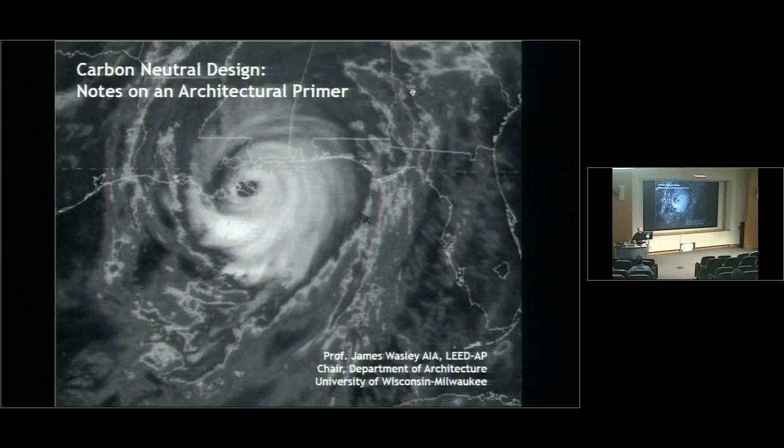So I'm going to be talking about carbon neutral design, and I'm just curious, what are people's interests, background, skills? Engineering, architecture, other fields? Architecture. Good. Engineering. Good. Anything else? Policy. Well, I'm going to talk about, it's a bit of a postmortem, and it's a bit of a kludged together lecture, 2 different projects that have been mining the same general vein.

The Carbon Neutral Design Project, which is what I was invited here to talk about, really didn't quite die. It went into a deep stasis when the economy fell apart. It was funded by the AIA, and everybody we were working with at the AIA was no longer working at the AIA. So I'm going to talk about a project that hasn't really realized its potentials. It had very ambitious complicated goals, and it had very ambitious, simple goals. And what I want to try to do today is talk, at least in an introductory way, that's why I called it a primer, on some of the simple ways of thinking about carbon neutrality.

Because if you're all engineers, my message to you is that if you're going to be working with architects, you need to communicate to them that it's their job to reduce the loads of these buildings down to the point where you can engineer them to carbon neutrality, because it is a design problem. It's not fundamentally an engineering problem. Sorry to tell you that, but I think this knowledge should empower you.

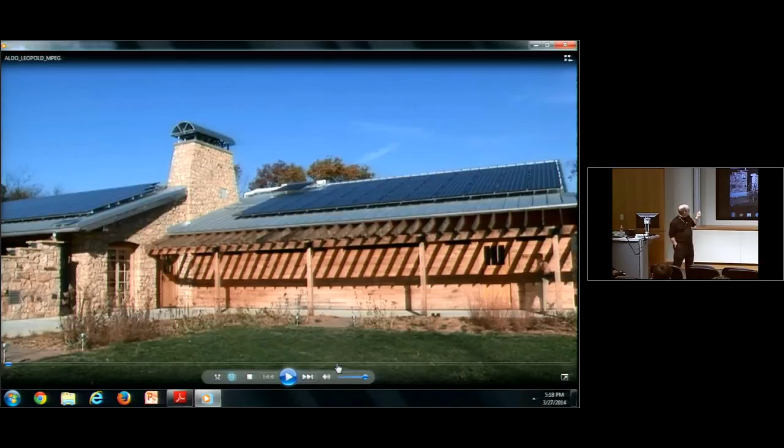I want to show a short video. This is going to set the stage a bit. It's a little bit of a diversion, but it does talk about the building that was at the heart of the Carbon Neutral Project. This is the Aldo Leopold Legacy Center. How many people have heard of Aldo Leopold? Only 2 of you. So Aldo Leopold was a great naturalist, really. In some versions of events, the father of American environmentalism.

He taught at Madison. This building is built outside of Madison on a farm that he reclaimed. It was a Dust Bowl property in the Sand Counties of Wisconsin. So it's a book called A Sand County Almanac. And if you haven't heard of that, it's a great piece of American literature on environmental thinking. So this building is built to honor his legacy. And I just want to play you this brief video that was thrown together to try to explain some of the ideas of the Carbon Neutral Project. And the sound should come up here in a minute.

Part of the limitation that architects have is their fee only goes as far as the completion of the building construction. So they have no way of learning, getting much feedback at all from how a building operates. It's just the economic structure of what we have to deal with.

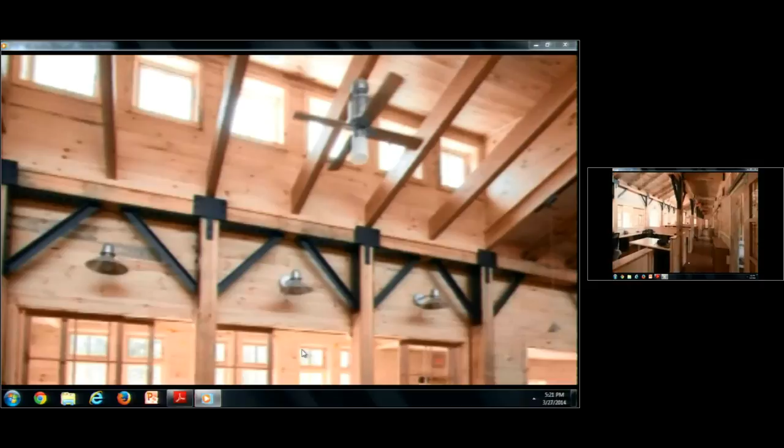The case study, and especially the work of Mike Utzinger, and the ability of the university to research how a building operates is utterly valuable to us as a student. So the case study is a direct feedback loop to the next building that we design.

The Aldo Leopold Foundation had a client who requested that the design team design a carbon neutral building, and we had to define what that was. And the process that we did in doing that was we said that the building had to be net zero. That is, the energy that we generate from the sun over the year for the building had to at least equal the energy that would come in from the grid. That is, what we produced had to equal the entire building's energy demand.

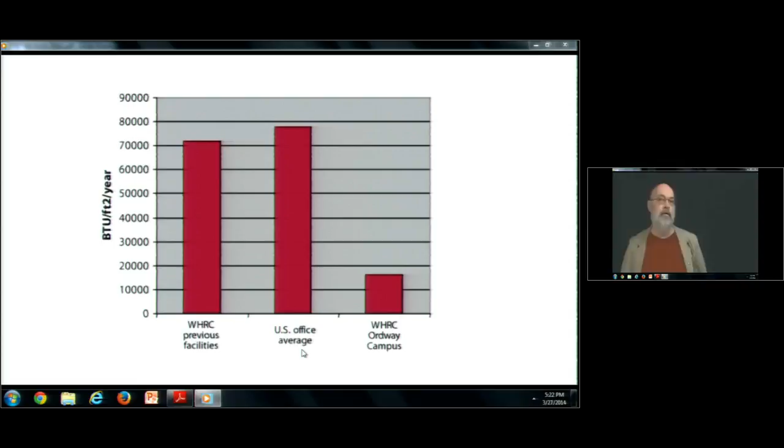And we depended upon our knowledge of other high-performance buildings to have an idea of what to do. Basically, we looked at a building that was designed by William McDonough, the Woods Hole Research Center, which requires about 5 kilowatt hours of electricity per square foot of building per year. And at the time, that was the highest performance building that I was aware of in the U.S. And I said, okay, if we can design a building that can achieve that small an energy footprint, we can meet that entire energy demand with 3,000 square feet of collector for a 10,000 square foot building.

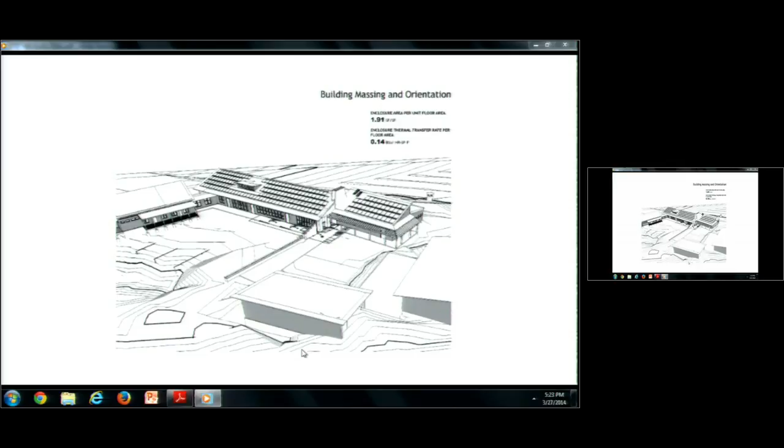In the design process, we used energy simulation to validate the design. We came up with a design that met, in design terms, that energy goal, and then that became the basis for building a building that was net zero. And it took the knowledge of other measured buildings to understand what buildings could achieve. And so now this building, the Aldo Leopold Foundation building, the Ideas building, which was designed by EHDD, that was one of the buildings here, are now examples of net zero. And most of them are using this approach, understanding what your goals are for energy use, and then understanding what your potential is for energy generation and balancing the two of those.

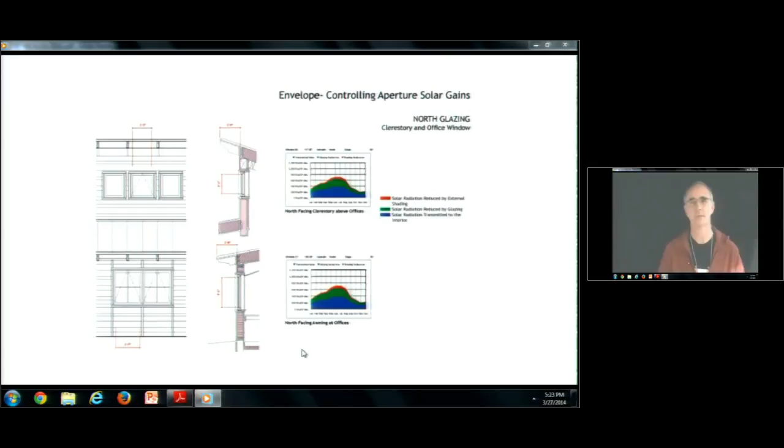Strangely enough, this project had very few surprises because there was such a fantastic team of people modeling and then checking the feedback from the building as it was used. We have to have more data on the kinds of things that people plug into the wall that you couldn't have foreseen. If we can measure enough buildings to see the difference between what was assumed to be plug load and what actually was a plug load, we'll have a better idea to build that amount of energy use into the model. We may then need more insulation, we may need more PV supplied, we have to balance the amount of energy produced with the amount of energy used, so that's a key part of the formula.

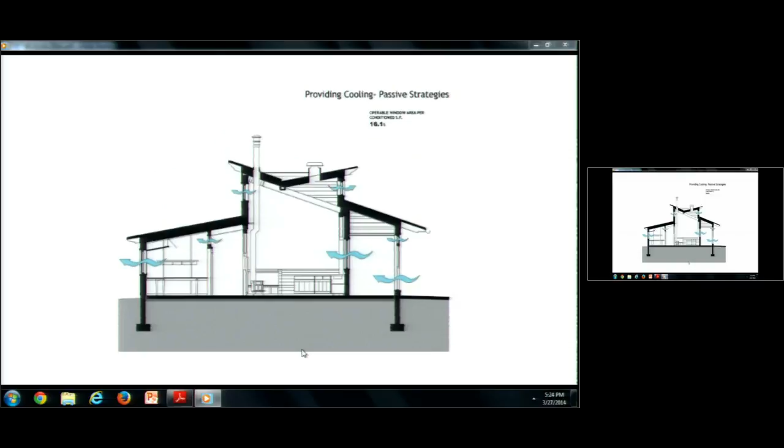The Aldo Leopold Foundation ended up not achieving net zero and carbon neutrality, but being close enough that we are fairly confident that by the second year or third year we'll be able to achieve it, just in terms of educating and working with the foundation on operating the building and even making some adjustments on some of the pieces of equipment that are in the building. And all of that is really that feedback loop coming back, or that knowledge of how buildings really work, and then moving forward in the next designs to really achieve carbon neutrality.

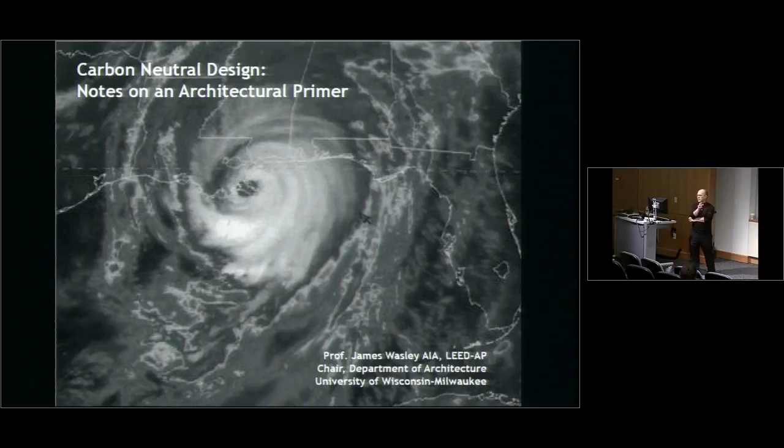Okay, so the first speaker, just for your background information, it wasn't really clear. Tom Kubala was the architect, Kubala Washatko, of that building. And Mike Utzinger is my research partner. He teaches at UW-Milwaukee, and he was the environmental consultant on the building. And it was, at the time it was built, the highest scoring LEED project built to date, and it did actually define carbon neutrality, which is an interesting footnote. Can anybody tell me the difference between net zero energy and carbon neutrality as a concept?

Yes? Is the difference between, say, buying offsets and then, say, generating all of the energy you need on site and having that amount to a net zero? I also like that. And all of these things are talking about the same thing. The distinction is actually very, not academic, but legalistic. The building is net zero energy, which means that it is producing as much energy as it is using. And that's annualized.

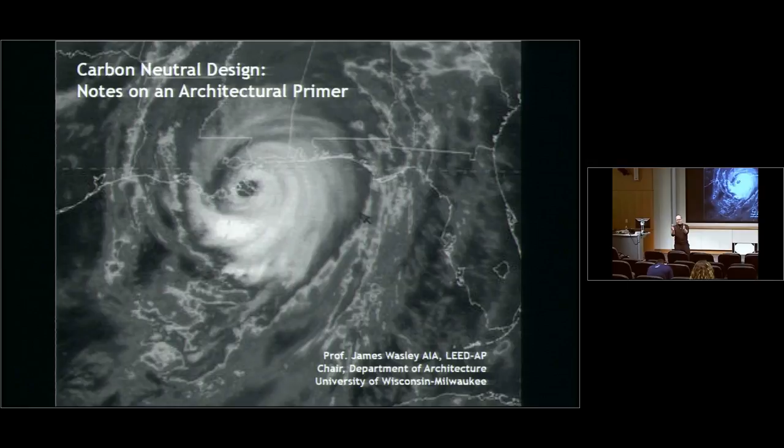So some days it might be taking energy from the grid, some days it might be putting energy into the grid, but over a year it is balancing. So it's not needing to buy credits. Carbon neutrality, and this is not going to show up on any test, but the way that it was defined by Mike in the LEED exemplary performance credit that defined it for the U.S. Green Building Council was defined like the international treaties on carbon trading define it, which is that it's the operation of an entity. So the Aldo Leopold Foundation is carbon neutral, the building is net zero.

So that means that suddenly the equation goes from looking at the flows of energy in the building to the flows of energy of the whole operation. Commuting to and from the building, flying to Europe to give presentations, everything that the organization does is balanced. And it does that in a way that I'm not even going to touch on until the very end. Maybe you can tell me at the end of the lecture how the organization balances carbon as exemplified in this building, although not limited to this building.

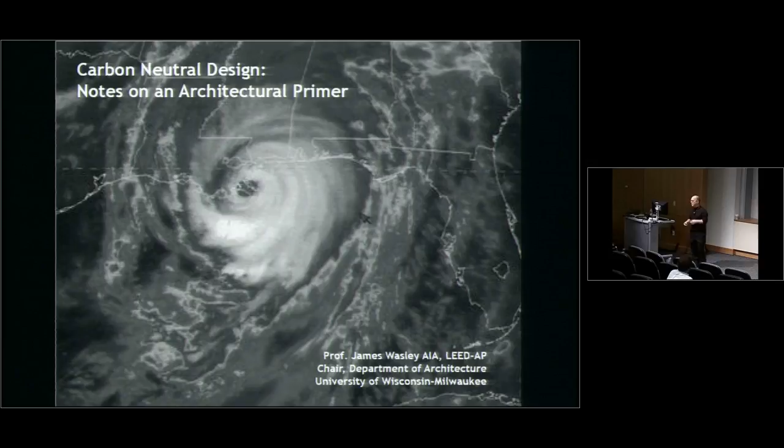So the prologue to this is that in architectural circles, there's a thing called the 2030 Challenge. Are people familiar with that term? So this was a statement from the American Institute of Architects. Recognizing the clear and present danger that climate change poses to our home planet, in September of 2006, the board of the American Institute of Architects adopts the 2030 Challenge, committing its members to the goal of achieving a carbon-neutral building design standard within 25 years and immediately producing buildings using 50% less fossil fuel energy than conventional practice.

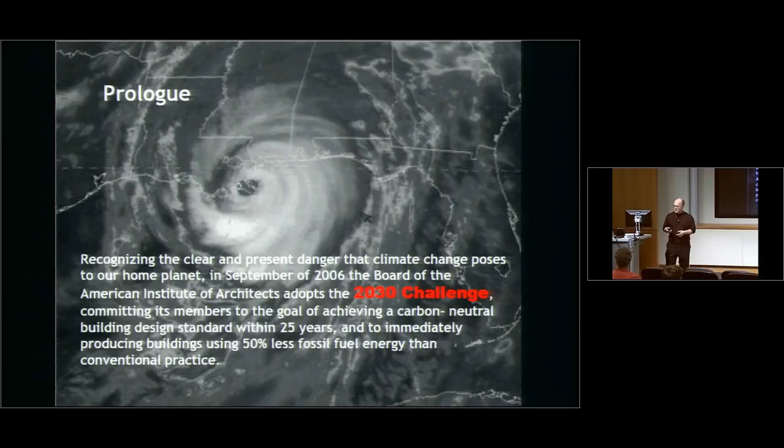So the fossil fuel reduction is the key, and that you are absolutely right about. That's what we're driving at, pulling fossil fuel use or carbon liberation from fossilized sources out of the operation of buildings. And this definition of carbon neutrality is completely different than the one I just gave you, because it's tied to the building. This is a sloppy definition. The one I gave you is defined by carbon trading protocols, because ultimately we have to imagine ourselves living in a world where carbon has a price and it's traded on an open market. And so your mission to reduce carbon emissions has an economic incentive behind it. Not there yet. We keep talking about it, we keep inching up to it, and then no.

So the 2030 Challenge was generated by Ed Mazria, and what's interesting about it is that it built in this idea of incremental reduction. So 60% better than code performance in 2010, 70 in 2015, 80 in 2020, 90 in 2025. By the year 2030, we should be building buildings that don't use fossil energy, don't liberate carbon. That was a commitment made by the American Institute of Architects. It's been made by many, many mayors and governors. And it's a little disheartening to realize how little teeth these kinds of political commitments have.

But I will say, I didn't see Texas in this website. I didn't see Wisconsin in the website. But I was just up in Minneapolis. And the state of Minnesota, I mean, I just came from Wisconsin. It's cold there. I'm still not used to not wearing a turtleneck.

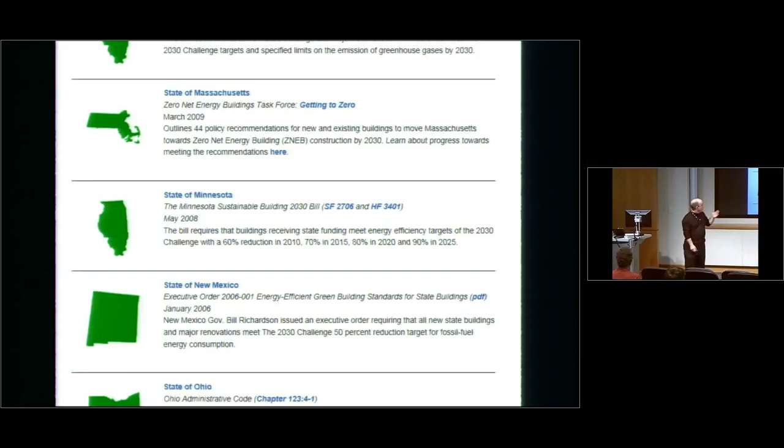Minneapolis is a lot colder than Wisconsin, and they are seriously committed to energy efficiency. They have a program that committed all state-funded projects to the 2030 Challenge, and they are on target to meeting that. And they are looking at a very interesting threshold. Right now, everything that's being built is better than code by 60%, but it's not better by 70%. And 2015 is right around the corner. And everybody in the state government and the energy efficiency community is working hard to figure out, well, it's gotten easy to get to here. It's going to be hard to get to the next step. But everybody's engaged in that challenge.

So I just wanted to let you know that even though a lot of this effort kind of fell apart when the economy fell apart, California has adopted the net zero carbon neutrality 2030 challenge. So this project I want to talk to you about comes out of the Society of Building Science Educators. And part of what I want to do is just introduce you to this as a resource. This is a group of teachers who teach environmental technology and architecture, but they have lots of interesting resources that even for engineering students might be useful on the website, sbse.org.

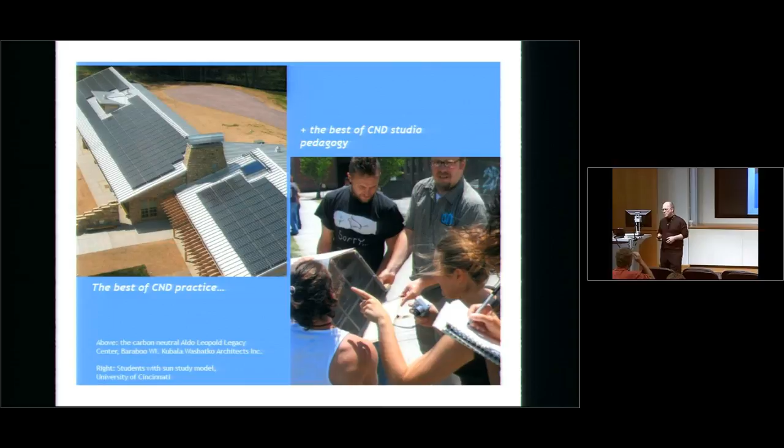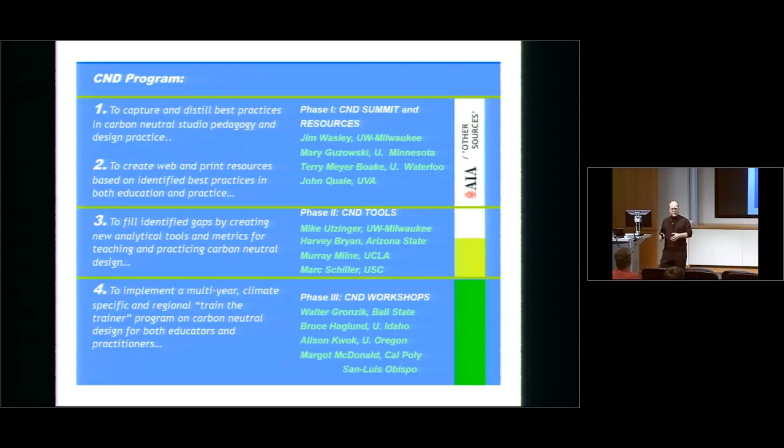And the goal of the project was to take the best of practice, because we were being funded by the AIA, and the best of studio pedagogy, which is the core of what architecture students study, how in a design studio setting to design a building. That typically doesn't involve a lot of deep, sophisticated analysis, but it does involve a strong sense of precedent and gut sense, and increasingly the ability to use simple tools. The project was conceived of as a 4-step project that would end up with us doing trainings all across the world. We got steps 1, 2, and about half of 3 funded.

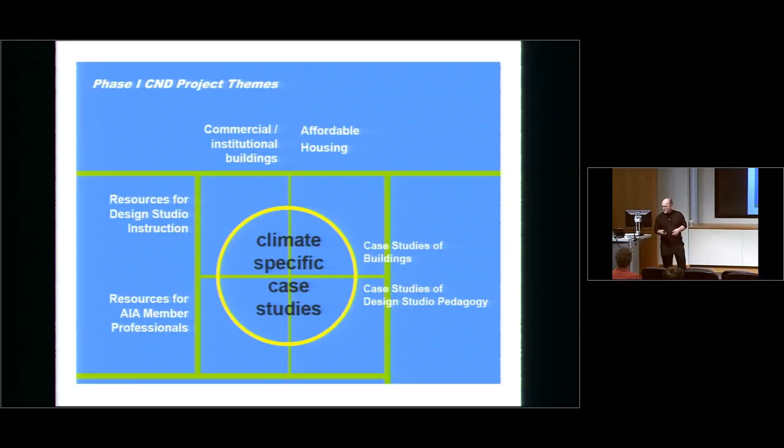It was very complicated, so the resources are diverse and all kind of half done, but just so you know how it was structured, there were commercial and institutional case studies because, again, we're being funded by the AIA. There were affordable housing case studies because we were also being funded by an anonymous nonprofit that invests in affordable housing research. We were doing case studies of buildings. We were doing case studies of teaching. That 4-quadrant matrix all comes together in this idea of the case study. What can you learn by looking around?

We held a lot of big events, brought experts together to talk through the building design. We had groups of faculty at all of these different universities talking about how they teach these issues. We tried to collect those thoughts. We funded several little sub-tools. So here, Pablo LaRoche, Cal Poly Pomona, did inventory of all the carbon calculator tools that are on the web that you can get for free, and what their pros and cons are, and how you might mix and match them to accomplish something. So that tool is up and available.

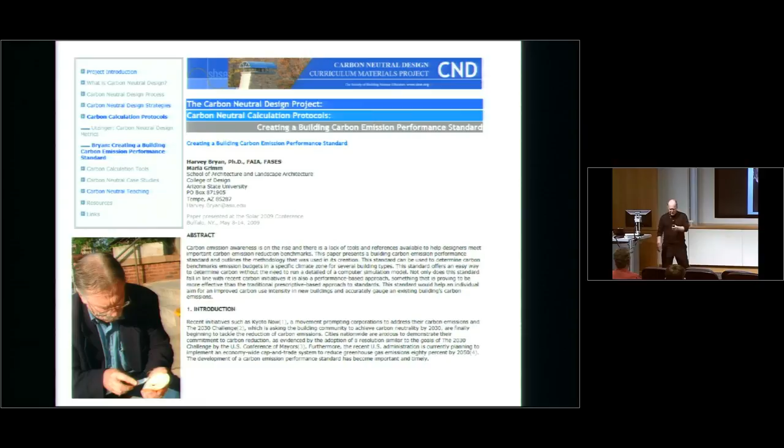This gentleman, Harvey Bryan, has Harvey ever lectured in this symposium? He's right across the way in Arizona. And so very, very brilliant, active in this field, developed a protocol to develop a benchmark. Now, a benchmark's an interesting thing. When you want to be 50% better than code, it really matters what you define code as, or as the 2030 challenge defined it, current practice, which is often not even as good as it should be, not even up to code. When you talk about carbon neutrality, you don't have to worry about any of this. The goal is really clear. You just want the building to use no more energy than it generates. But that tool is also there on the website.

We cataloged a whole series of profiles of studio instruction practices. Very simple. If you want to go into teaching architecture, here's a how-to. And if you're an engineering student that just is curious, I brought 3 of those to give away. They include short descriptions of how the studio instructor defines carbon neutrality. Because when we were doing this, almost 6 years ago now, 7 years ago, this was a very new concept. But it's really nothing different than just getting very clear about defining the goal of being in balance. Everything up until this point has been about that, defined in other ways. So it's not like we're talking about a whole new subject here.

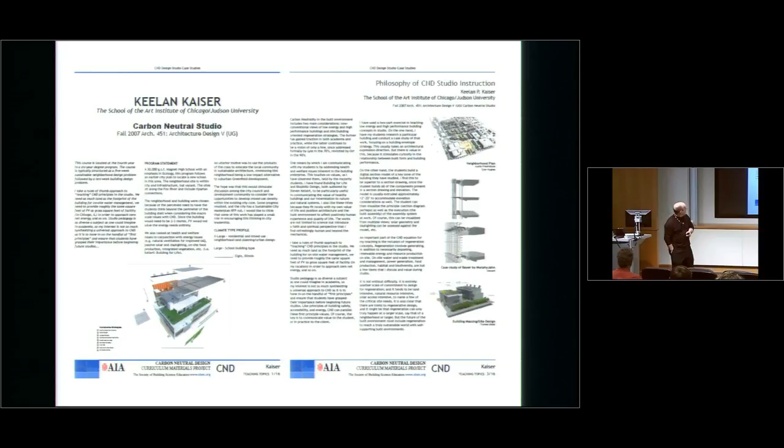I love this little thing. All of the faculty contribute 10 things that they think are really critical, 10 mistakes that students commonly make. And so I just highlighted one. If I was to say there's a foundational idea, this is so obvious, but it needs restating. Privilege building performance issues as a parallel consideration to all other design priorities, including client needs, aesthetic approach and cost evaluation, i.e., environmental issues are always parallel and never in series. And that's true of all issues in design. And I would think that's true in engineering as well as architecture. The goal is to learn to juggle and to work things and not to privilege one over the other, not to decide one whole set of decisions before another.

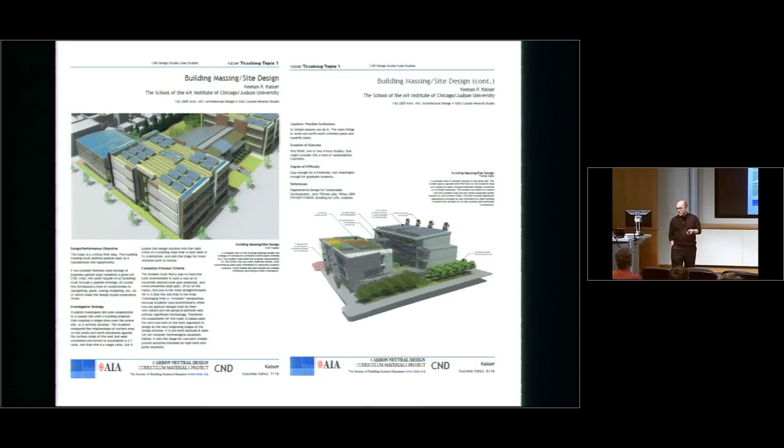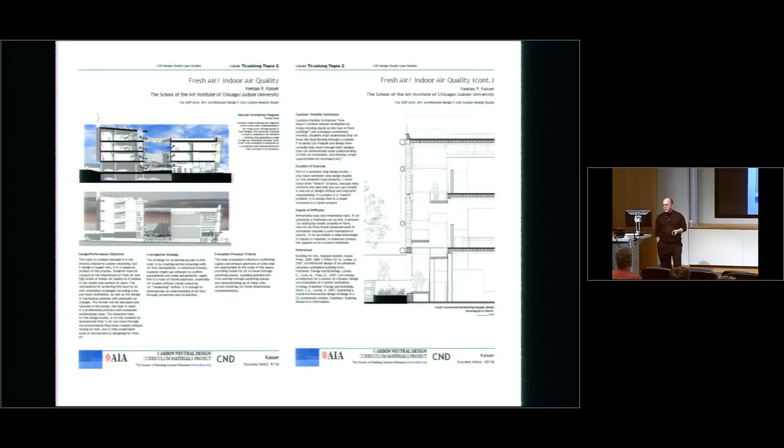And then the books have a series of exercises, 2 pages each, very clear instructions, which software was used, what the pitfalls are, looking at different topics that might show up in a design studio setting. Indoor air quality, fresh air, daylighting, passive solar control. These are all things that you engineers are probably learning in a much more nuanced and technical way. Designers are trying to learn how to juggle these things. So they're never very deep, but they're very broad.

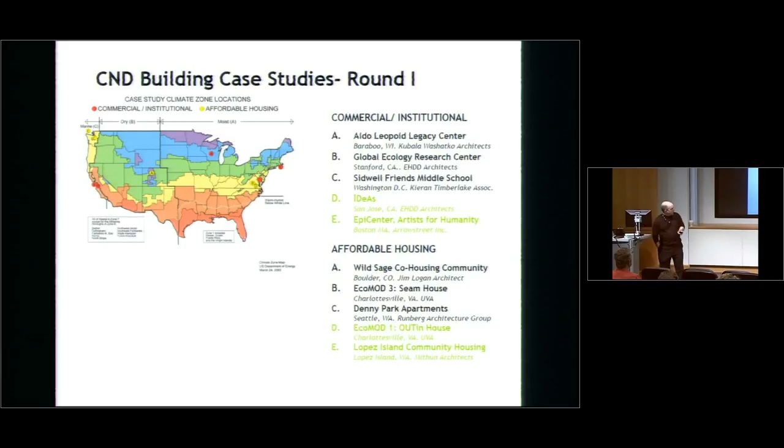And then there were a series of building case studies. Commercial institutional, the Aldo Leopold Legacy Center is the deepest case study, and it's the only one that's really even halfway complete. And then the affordable housing. Again, trying to scatter across climates because I'm going to make it sound like all of these solutions are equally applicable to every climate, but you have to know they're not. You have to know that climate and site and the specificity of each individual problem really still drives things.

That was a fundamental mistake of architecture of the 20th century, to think that with enough energy inputs we could ignore all of these specificities. The goal is to get in touch with things. The goal of the case study process that you saw the video about was, this is the complicated goal, and I'm going to pitch it to you and say, if you're interested, I can put you in touch with Mike. He developed a spreadsheet approach to simple building metrics.

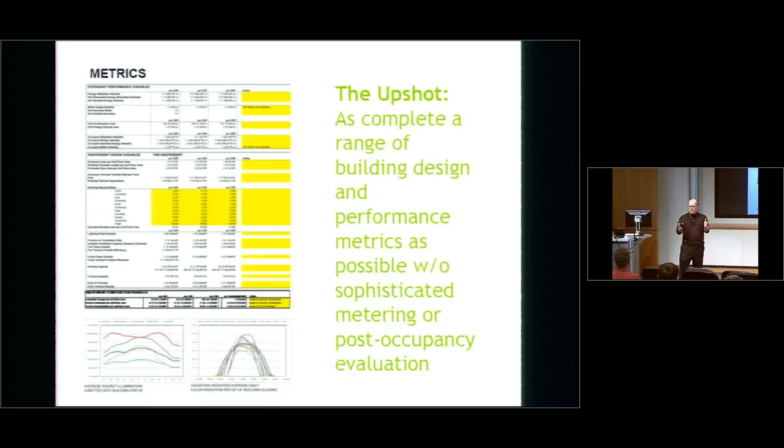Let's just talk about the physical aspect of the building. Nothing that requires sophisticated monitoring, nothing that requires anything more than a utility bill, but that does require that we know exactly how many pumps and how many fans and how thick the insulation is and exactly what the glazing is, and we can characterize the physical building. You can do that with a set of drawings, in theory. This has turned out to be much harder than it sounds, but the goal was not to have to go in and spend a lot of money.

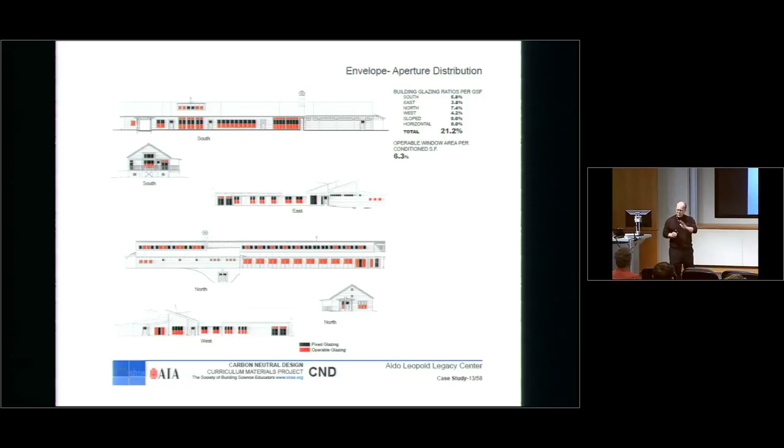And out of that, generate something that gives you very clear indication that buildings that are designed to be this efficient should physically be different. And the question is how? What are the things that are going to be different about them? My part of this was to try to come up with a common way of what we would say drawing through the problem, representing each of these metrics or the things that we were trying to get at in a common, simple diagrammatic vocabulary so that we could set up a comparative solution.

So here we're looking at a simple way to talk about glazing ratio per square foot of floor, fixed and operable. Being able to open a window turns out to be incredibly important. If you can't open a window, you're dependent on a fan. How the walls are constructed. Funny thing about this little building is that it's got 6 different wall types. They threw every different way of insulating a wall they could think of into it.

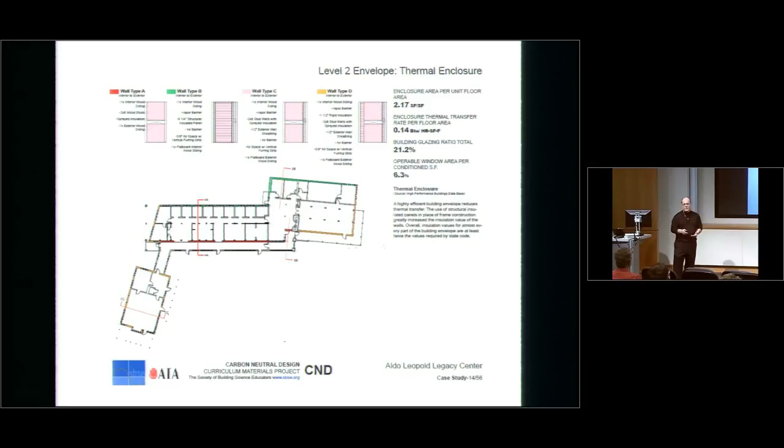How deep daylight penetrates without really measuring anything, just using rules of thumb. Can we quickly assess the plan to say this is a building that's going to be daylightable, that you're going to be able to turn the lights off? Because ultimately the goal of designing a building that uses less energy is to turn things off. Can you light the building without electric lights? Can you ventilate the building without a fan?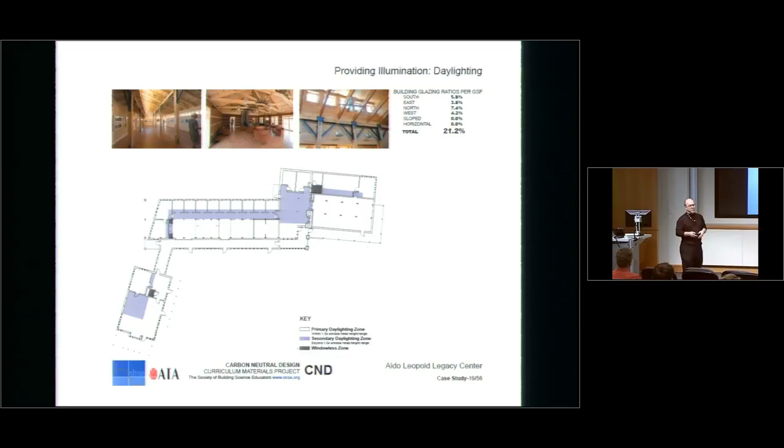Looking at thermal zoning. How is the building structured to protect certain areas and sacrifice others, let things float and let things be controlled? This turns out to be incredibly important. It's stuff that any mechanical engineer from the 1950s knows but thinks about in a different way. The question here is, how can we think about that strategy of saying, well, I might own the whole house, but I'm only going to heat the living room because it's friggin' cold and oil costs a lot of money. Or because simply the goal is to structure the space so that the uses are using energy as efficiently as possible.

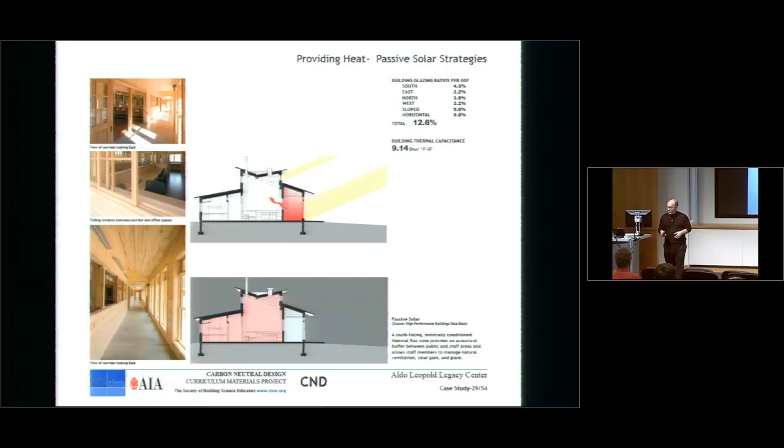Air is a really rotten way to move heat around. It's a lot of fan power. So fundamentally, you want to separate out, you want to say, let's just provide enough fresh air to be comfortable, to meet the code, to be healthy. Maybe that's even more than code. Maybe that's 100% fresh air, no recirculation. But we're just going to design this air system to move air. We're going to move heat and cold with water.

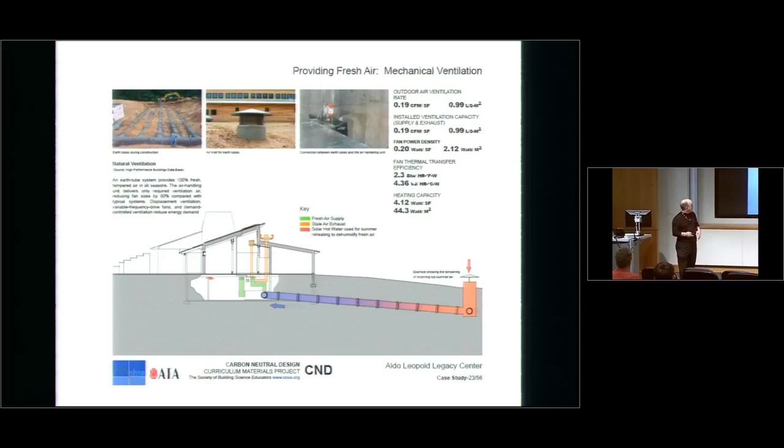And part of why this solution was appropriate here is that this is the sand county. This is very well-drained soil. And so these tunnels are very dry. The other thing they're doing is using solar hot water to reheat the air in the summertime, which seems paradoxical, but they're essentially dehumidifying it by pre-cooling it, dropping it down below the temperature they need, and then heating it back up with solar hot water. So using heat from the sun in the summer when it's available to cool.

Isn't that cool? And then finally, it's representing all of these systems, because for an architect, all that matters is how these things spatially fit together. We leave it to the engineers to figure out how to make it most efficient. And there was an engineer, he's actually a Texan, who was part of this project, Ron Perkins.

Does anybody know Ron Perkins? So Supersymmetry, I believe he's a Texan. He told stories of paragliding and kicking warthogs or something. This was his sport in West Texas. He came into this project. I think he's from Texas Tech. Does that sound like something they would do out there?

He came into this project, and the engineers had laid out, now we've separated air and water. We've got radiant heating and cooling in the slabs, and a geothermal system linking this building to the ground. We're using water. It's very efficient. He said, no, too much pump power. He sent the engineers back to the drawing board.

They reduced the pump power by 80% simply by doing something that you might have read about in a book by Amory Lovins, which is that you think about fluid flows first, you design the pipes, and then you put the machines in. You don't put the machines in and then design the pipes to connect them together. 80% reduction in pump power just because they were told, no, it's too high. That's the power of knowing how low it can be and then trying to hold to that. That was the goal of the case study, was to reveal these numbers that we should know but we just haven't really looked at. How low can the pump power be to drive a building like this?

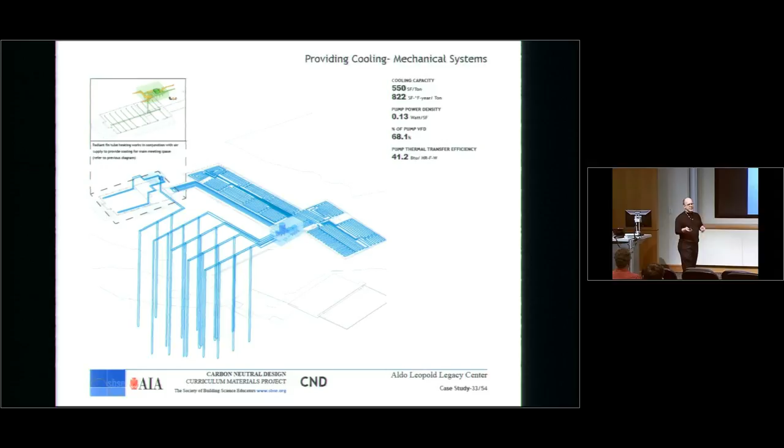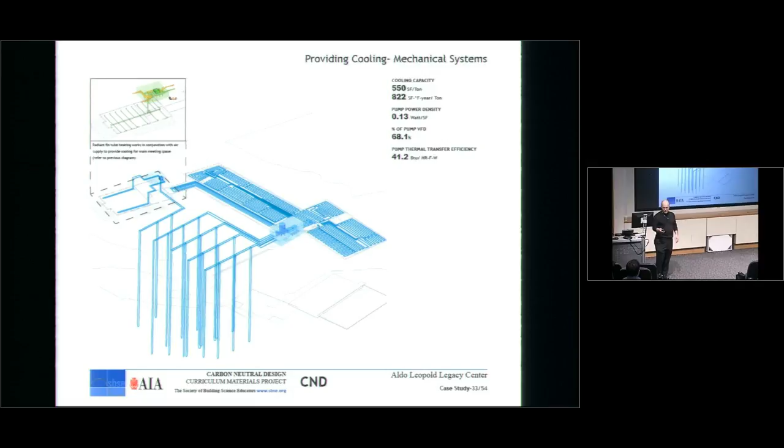And I just threw this in to remind us now that we're doing cooling with a radiant slab as well, which again seems dangerous in a Wisconsin climate, which is a little bit like this in the summertime. Feels like it does here now. It's humid. But again, this is the sand counties. It's out. There's a lot of air circulation. And we're preheating and pre-cooling the air, so we're limiting the amount of humidity inside. And so we can raise or lower the floor temperature without fear of condensation. It's those balancing acts that make it specific to this place and this set of solutions.

And finally, there's the issue that Mike started to talk about in the video, which is the fundamental idea here is to say, first of all, let's ascertain how much energy we can generate and how much space we can build given that amount of energy, given our goals to make that space as efficient as we can possibly make it. How efficient can we make it on the one hand? How much energy can we generate? What's the balance there?

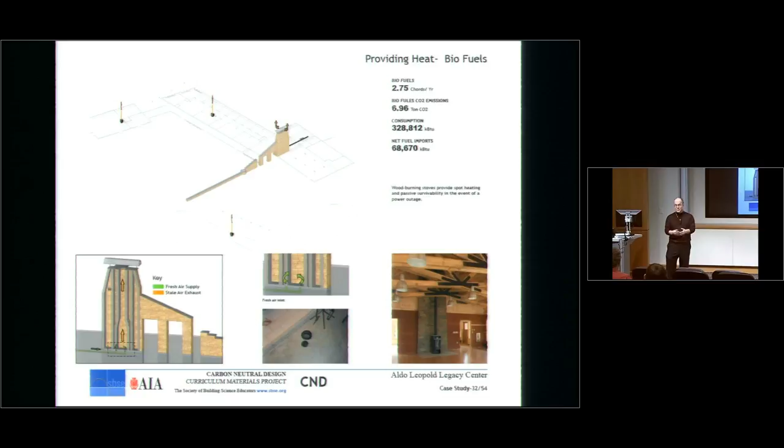And because the goal was to draw through every system, I have to acknowledge that, yes, in fact, there was fireplaces. Now, is this a carbon neutrality scheme? This is a tough philosophical argument that the design team wrestled with a lot. It's not fossil carbon, it's terrestrial carbon. It's a shorter cycle. It's coming from the Leopold woods, trees that he planted, just like every piece of this building is. But it is burning carbon. It turns out the winning vote was the 90-year-old daughter of Aldo Leopold, who said they grew up, and if you read the Sand County Almanac, it's all about being out at the shack around the fireplace. So the fireplace became significant above and beyond the issue of carbon neutrality.

The other outcome that's physical is the affordable housing guide, and I've got one here I can give away, and I'll just throw out, again, to just keep hammering on different ways of framing this basic proposition that if you want to design carbon neutral affordable housing, just like any other building, you want to start with that assumption. That has to be the goal. You can't inch up towards it. You have to start with that goal. Secondly, you have to design for an architecture without power. You have to think of it like architecture unplugged. It's an acoustical set rather than an electrical set.

That might seem like that doesn't involve you. As engineers, I want to say that it does, because you have to convince and work with the architect to make these things happen. Designing for no power is just the same as designing for the use of power. That should get you the first 50%. It's all about the design. It's all about the form, the mass, the orientation, the shading, the insulation. The next 25% is the engineering of the systems to be inherently efficient. This separation of air and water is one fundamental principle that seems to apply through a lot of the case studies we began to look at, didn't finish looking at.

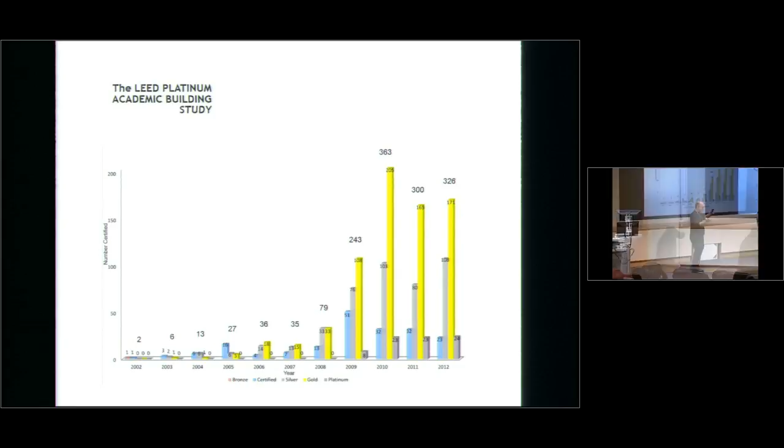But the 2030 Challenge existed. It was a proposition to leapfrog LEED, to set energy standards that were higher than LEED. And it's part of this back and forth between the U.S. Green Building Council and the AIA. What we see here is, lots and lots of buildings are gold, very few are silver certified, and there's been a steady drumbeat of about 20, 25 buildings a year being built to the platinum level on university campuses around the country. The first 10 of those I tried to visit every single one of and do very simple things.

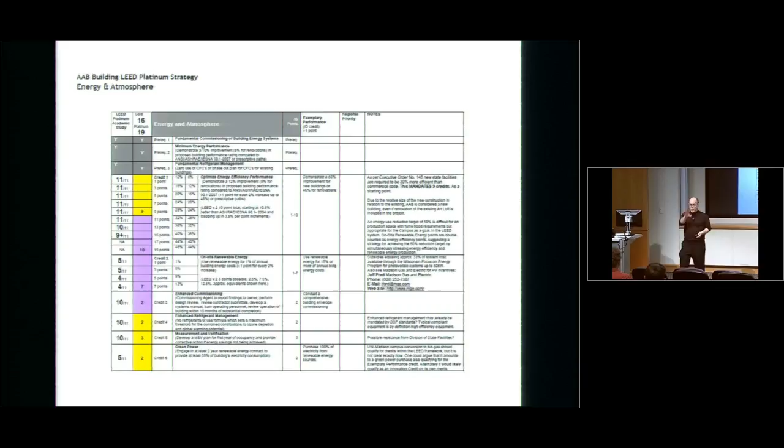So the question, again, I would put to every student looking at this stuff, I'm not very sophisticated. What can you learn by just looking? What's around you? One thing we were able to say is, okay, University of Wisconsin, here's a strategy to build the next building to LEED Platinum. Here are the points that you would do to get gold and that everybody's doing. And here are the points you would do to get platinum. And by the way, 10 out of the 11 first buildings to do it got that point. What's so hard about that? If 10 out of the 11 buildings could do it, you can do it too.

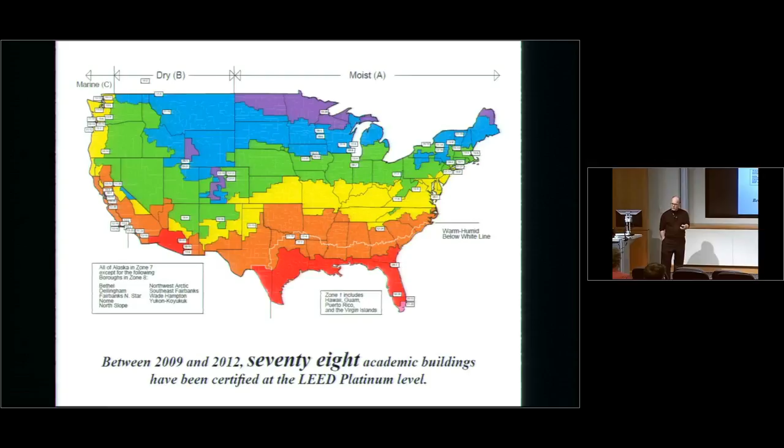So as of a year ago, my most recent data, 78 academic buildings have been certified at the platinum level. I can tell you that there are 3 in Texas and none at UT Austin. I can tell you that there are 16 laboratories because I've just been given a study on our campus to write a green spec for the next round of laboratory building. And there are 16 labs around the country that are built to this standard.

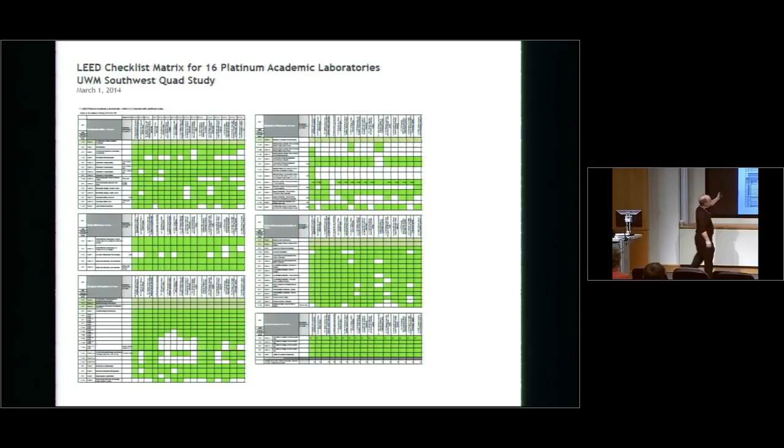Labs are hogs. Everybody knows that. Labs can't be energy efficient. These are platinum. That means that they're at least in the 50% improvement range, you would hope. And you can tell that many points everybody gets and that some points nobody gets, and so you don't sweat it. Very few labs worry about adaptive reuse of historic structures, although there are 2 up there that did.

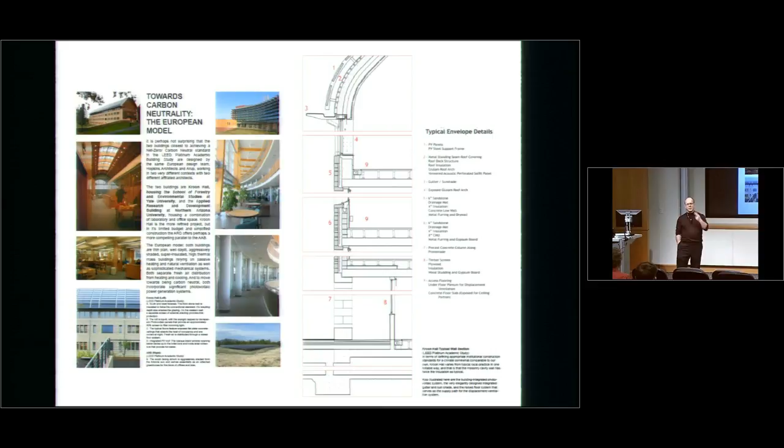2 of the 10 really caught my eye, and they do tell a very specific story that kicks me in the shins. These 2 buildings, Kroon Hall at Yale and the Research and Development Building at Northern Arizona University. I'm sorry, I'm blanking out. Both built by the same architect, engineer combination, Europeans. Michael Hopkins and Partners Architects, England, Sir Michael Hopkins, Arup Engineering.

That sucks. That's a damnation of the U.S. It's not that we don't know how to do these, but they know how to do them better. They have a reputation for doing them. What are they doing? Well, here is the teaching tool that I evolved at the same time as I was teaching studio, just like I showed you other teaching tools. I'm teaching studios building academic buildings, so there is a difference. Let's get it up front between big university buildings and small nature centers. I find big university buildings more interesting, but they're fundamentally different energy issues.

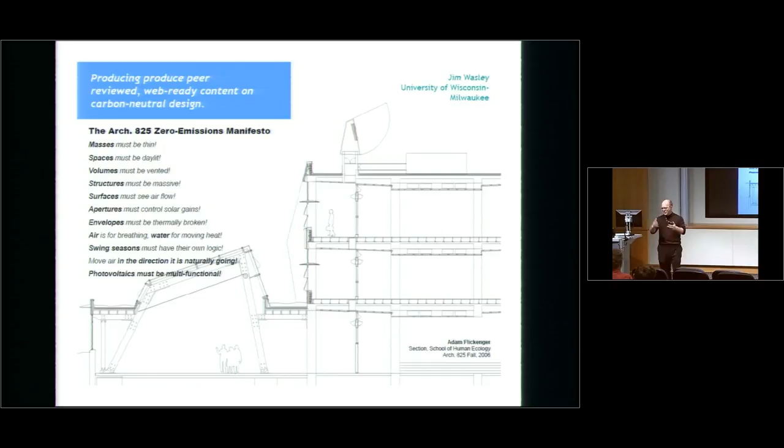So, Yale University, Kroon Hall, thin plan. That roof is actually one big rack of photovoltaic panels. Yale, New Haven, pretty mixed climate. Pretty cold winters, hot, fairly humid summers. All kind of hugging the humid side of the world.

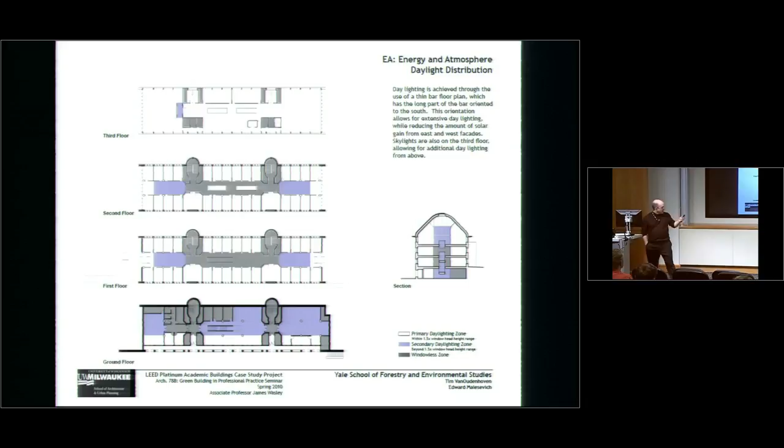If we use these really simple tools, now these are student case studies, it's thin, it's daylit. There are very few spaces that are completely dark, the gray. There are a lot of spaces that have access to light, but perhaps by this rule of thumb, it's further away than 1.5 times the height of the window.

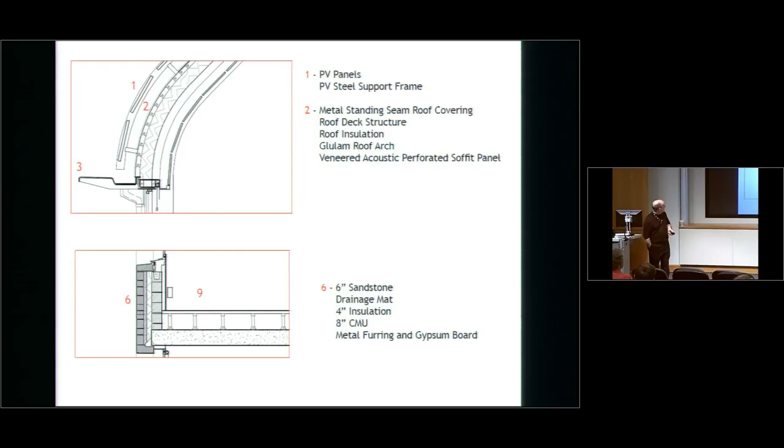It's got a phenomenally well-insulated envelope, 4 inches of insulation, rigid insulation outside of a masonry unit backup wall. I don't have the dimensions with me on the top, but it's at least 8 or 10 of rigid insulation again. It's a thermally broken envelope. It's a very well shaded envelope.

This is a very traditional building with thick walls. Even though the walls look thicker than they are, those stones are articulated so that they're fins and the glass passes behind them, kind of a play on the idea that they're Gothic and thick. But they act as shading fins. So the walls protect the glass from the sun.

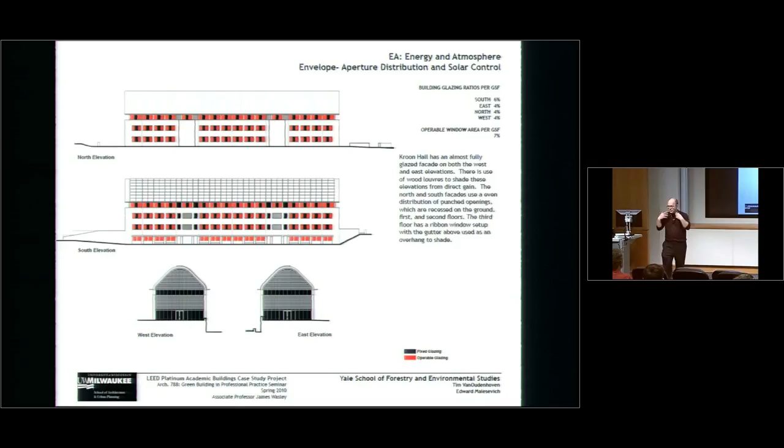It's got a lot of operable windows. You look at it, you can see both sides, every floor opens up. Most spaces have clear paths for air movement. Only the stairwells aren't naturally ventilated in any kind of clear way for obvious reasons. They're fire stairs.

And it's thermally massive in a way that connects that mass to air movement. What Hopkins does, typically what's the European model, I would say, is the idea of using a raised floor as a plenum to distribute air through buoyancy, much less fan power than distributing air through ducts. And the backside of that benefit is that now you have a concrete ceiling and not a concrete floor.

And so the ceiling is where all of the heat is rising. And the ceiling is a thermally massive surface, and so it's absorbing the heat of the lights. And as air is drawn through the building, it's absorbing the heat of the air. And so it really is engaged as a flywheel.

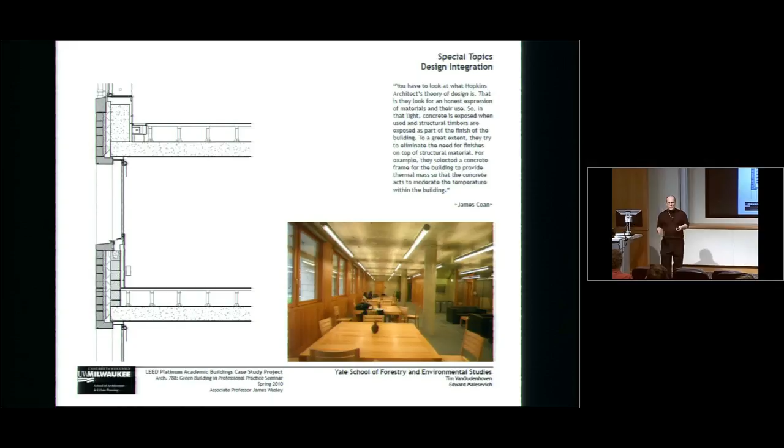And finally, that the PV systems are sized in somewhat accordance to the loads. This building has 2.8 watts per square foot gross building area. Aldo Leopold has 3.2. So it's not so different. This is a 4-story building. This is very hard; typically you'd say 1 to 2 stories you can power with the roof. Here, the roof is so extensive and so from wall to wall that they're close to carbon neutrality.

Now this building, for a reason we will discover, we haven't really gotten data on. I doubt it is actually carbon neutral, but it is heading in that direction. Its intention was to be that. The dark windows are the toilet cores. Those are evacuated tube solar hot water collectors, so they're heating water for the bathroom cores in the bathroom cores. It's a very elegant, understated solution.

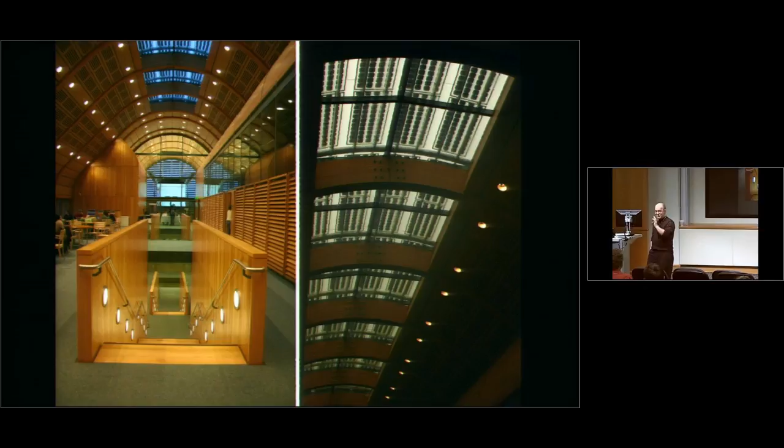And my favorite integration, I said the PVs must be multifunctional. Here the PVs are a translucent sunshade over the skylight, bringing light into the center of the building. So they're acting in 2 ways. They're both generating power and acting as a shade by the fact that they're intercepting the sun.

So we see that list again. What that list doesn't include is the fact that this does have a geothermal field in the foreground here. So this building is not only thermally massive, it's connected to the thermal mass of the Earth as part of its mechanical strategy. But what we really don't see here is that this building is not just a building.

It is a massive piece of infrastructure that replaces and connects underground tunnels that serve this whole quadrant of the campus. And so this is the reason why this building is hard to get energy data on, because it is not an isolated object. It is part of a larger system. I would argue that that's what makes it great, because it's leveraging its own building construction to solve larger problems.

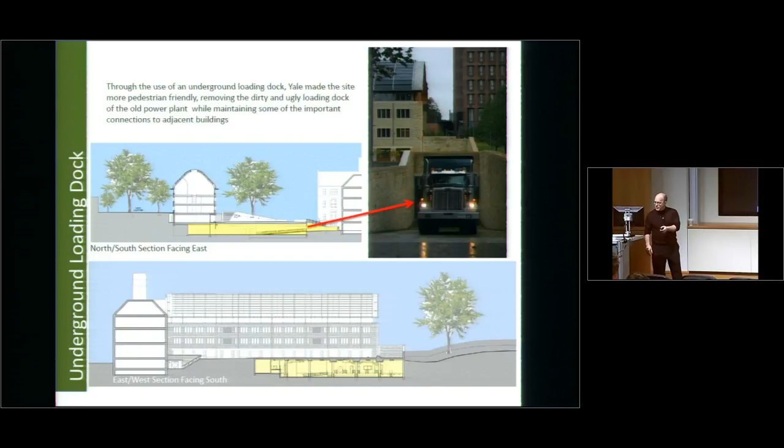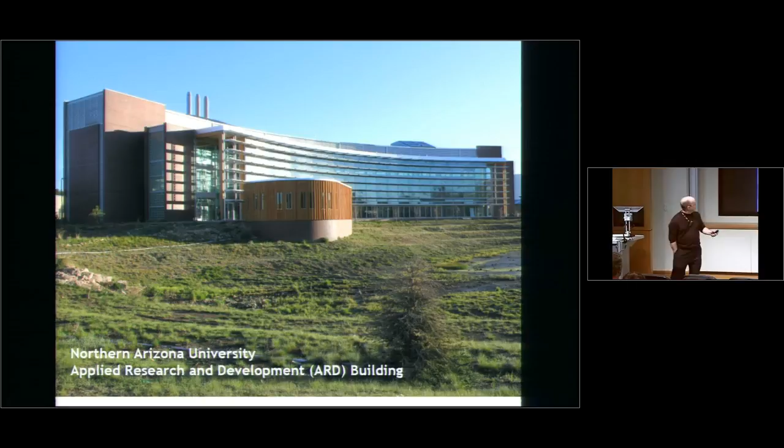Finally, and I'm going to do this very quickly, I appreciate the warning. The second building I mentioned was Northern Arizona University. Now, this is Arizona. It should be hot, but it's friggin' cold. It's up at about 7,000 feet. It's a 7,000 heating degree day climate, almost no cooling load. And every day and night, hot, cold, hot, cold. It's a desert, high desert.

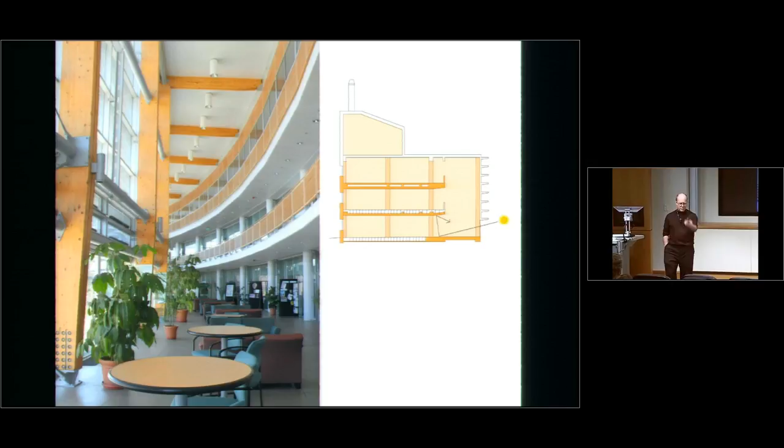It's a thin plan, we know that. It's fundamentally a greenhouse. This is unique to its site and climate. This space is fundamentally a south-facing greenhouse with a thermally massive floor and back walls. And if you look at the design evolution, the engineers were convinced that the greenhouse could be all glass all the time. And what the design has done is throttle that down to the appropriate balance between insulating, controlling the sun, and having solar access.

So the greenhouse was glazed on the roof and much taller than the building. Now the greenhouse is just the height of the 3 occupied floors and not glazed on the roof. And it's very well shaded. It's got operable windows at the top and the bottom, driven by a computer that ventilates the greenhouse independently of the building so that it is very easy to control. It's a blessing of a desert climate.

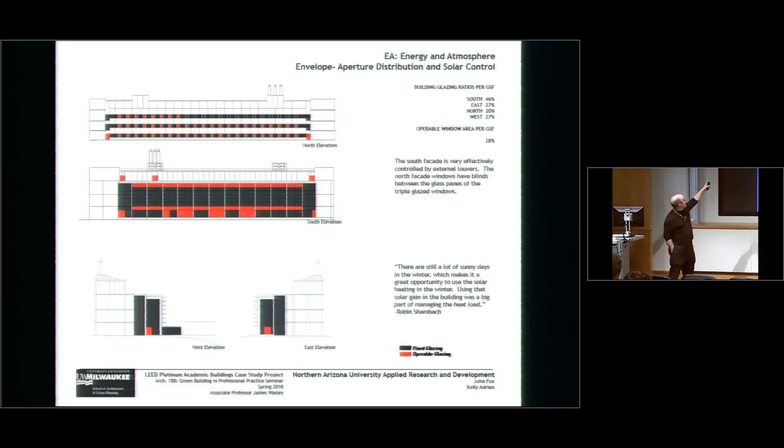And there's something else interesting that shows up in this kind of analysis. The top floor, the red windows stop. I'm taking time, but I've got to know, does anybody have a guess why on the top floor the red windows would stop? Suddenly there are no red windows on the right-hand side of that drawing. There are no operable windows.

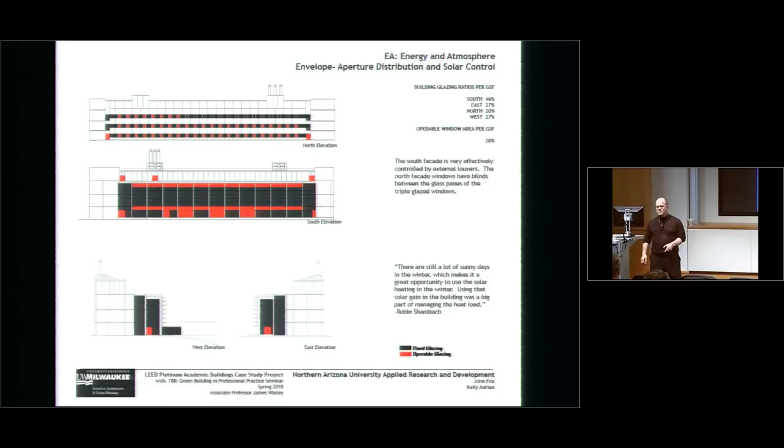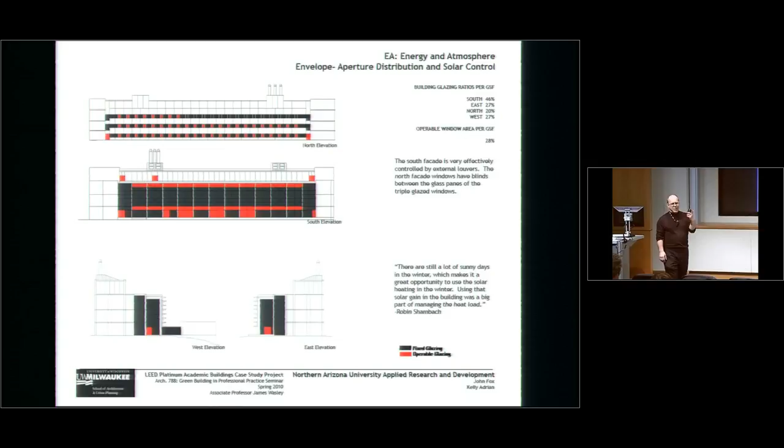Because the top floor of this building, where the fume hoods are, is a level 3 biohazard lab. I don't know if I have the classification right, but this is where they do testing of anthrax for when the president gets a letter that has an anthrax threat to it. This is where it goes. So that is a lab that is an energy hog. There's no way that that lab is not operating 100% fresh air at a very high volume all the time, and it's built like a submarine.

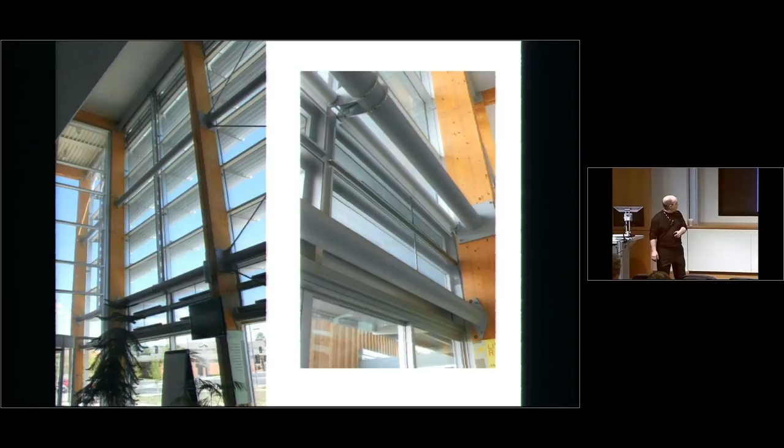So I talked about the fact that the glazing is operable, and there are shades that are mechanically driven, and that the wall is very well insulated. Here, it's got chopped up denim as a cotton batt insulation on a 10-inch stud, which thermally seems like a bad idea to have the metal stud there, but then it's got another 2 inches of rigid insulation on the outside. It's a very well thermally broken wall.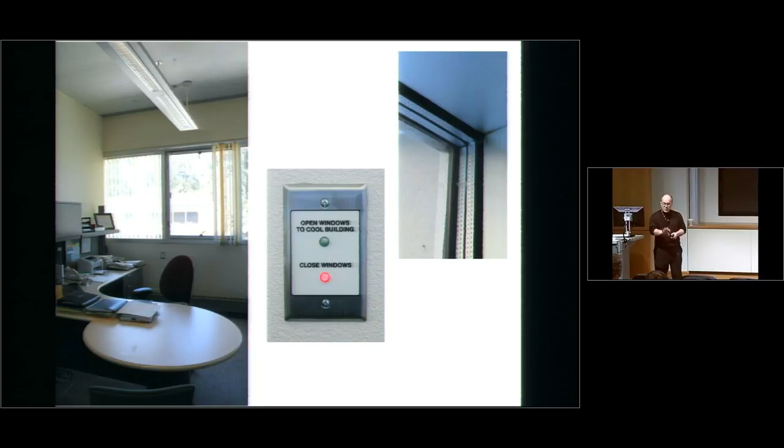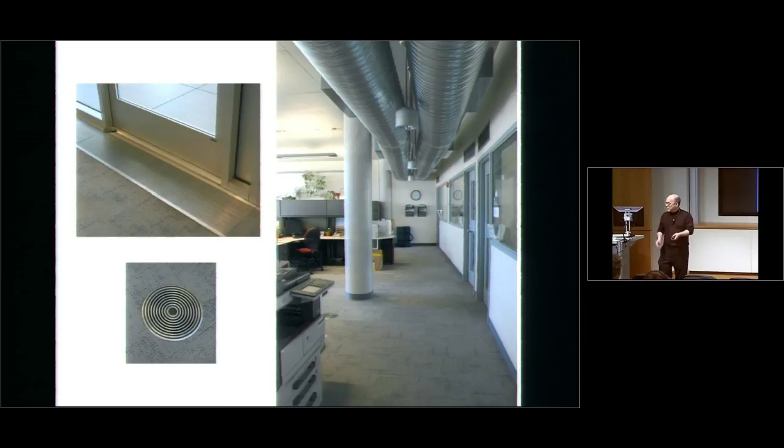Daylight and windows that are controlled by a little green light that tells you it's okay to open the windows, or no, it's too hot, too cold, close the windows. It's very well daylit. It's very well naturally ventilated on the floors except the lab. And it's thermally massive. The surfaces of the concrete are open to air circulation. It has a raised floor, so the air is being ventilated by displacement ventilation.

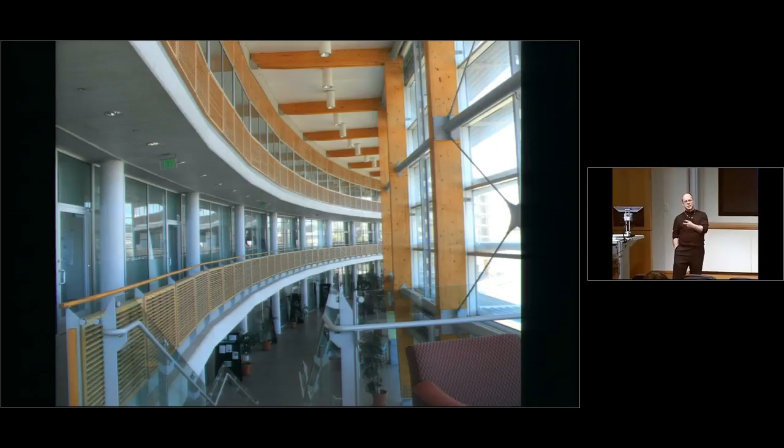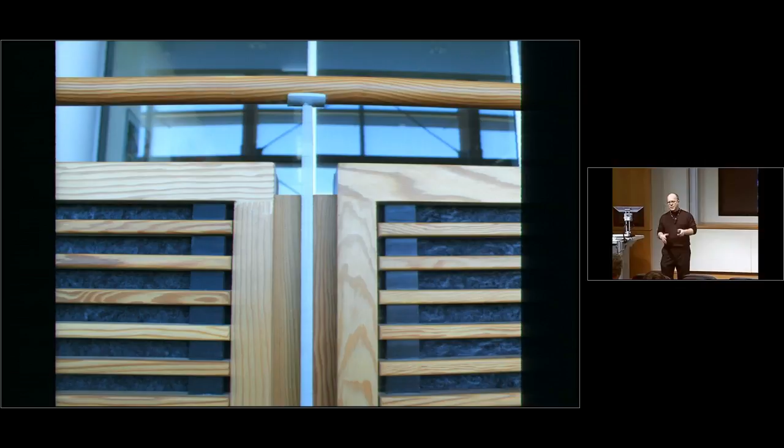And finally, there's something else that you should know, that every time you design a solution to solve one problem, you create another. This European model, high mass buildings, especially with a glass and concrete space, has horrible acoustics. And so all of that railing we saw is actually acoustical batting filled with denim to create some sort of acoustical soft surfaces in there, to take what you're trying to make as a thermal environment and not turn it into an acoustical nightmare.

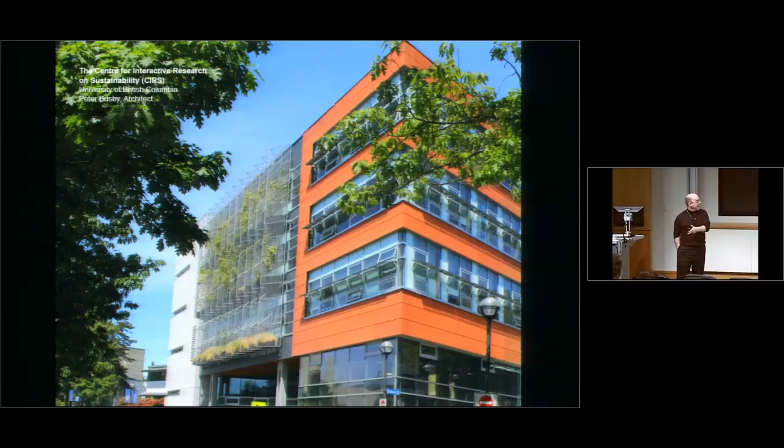This is the CIRS Building on the UBC campus. This is a living building challenge building, meaning generating its own power, capturing its own water, treating its own waste, not just better than code, but net zero in every category it can be. It's a large piece of scientific experimentation equipment.

And how does it get to net zero? It's very clever. It gets to net zero by recognizing that there's a 1970s laboratory next door that has very inefficient fume hoods but has no plans to renovate them. It says, hey, let us steal your waste heat. We'll take it into our building, we'll heat it, and we'll return it to your building in a form that you can use. So it is physically breaking down the idea that the building itself is what matters.

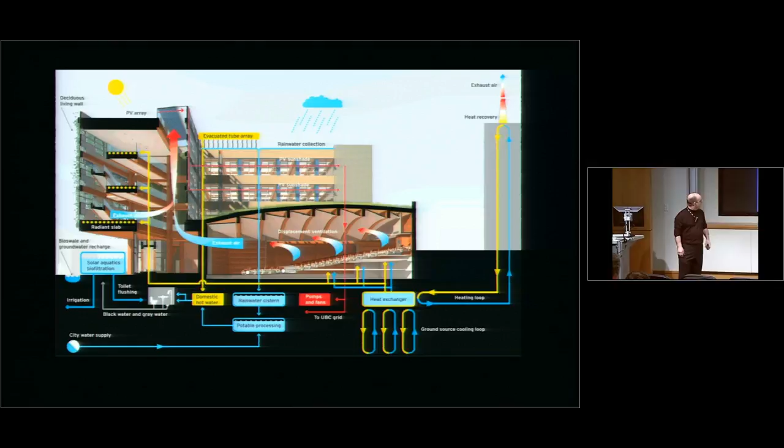The building is now reaching out and developing a symbiotic relationship with another building to say, let's both be more efficient by my investment. Which brings us back to the Aldo Leopold Foundation and another issue that hangs there.

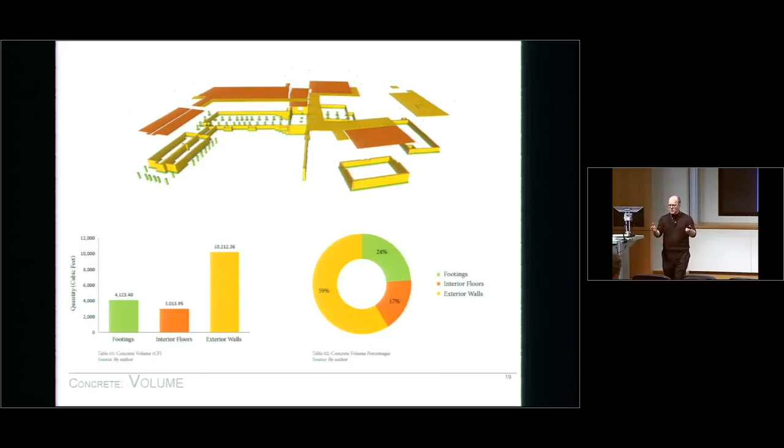This is the very beginning of a PhD dissertation, so we don't have any numbers yet, but this student is looking at the embodied energy in the building. And even though the building is a wood building, there's a lot of concrete, and concrete is the highest embodied energy material of the building. What we're going to find is that there's a lot of energy embodied in this concrete. So you've got a building that is using no fossil fuel energy, but generated a lot of carbon in the making of it. Should that matter?

For the architects, the idea that they could make retaining walls out of stone because the stone was local and actually already quarried, and all they had to do was get a backhoe to drag them over and stack them up, seems like a win-win. It's suddenly a lot less energy intensive than the concrete retaining wall would be. Which takes us back to the ARD building.

The most interesting thing about the construction of this building is not that we had European contractors working in Arizona, because it was all done by local people, but it was 40% fly ash. Why would that matter? Fly ash is an industrial waste that comes out of coal-fired processes, used to substitute for Portland cement. So it's much less embodied energy in the cement that makes the concrete hard.

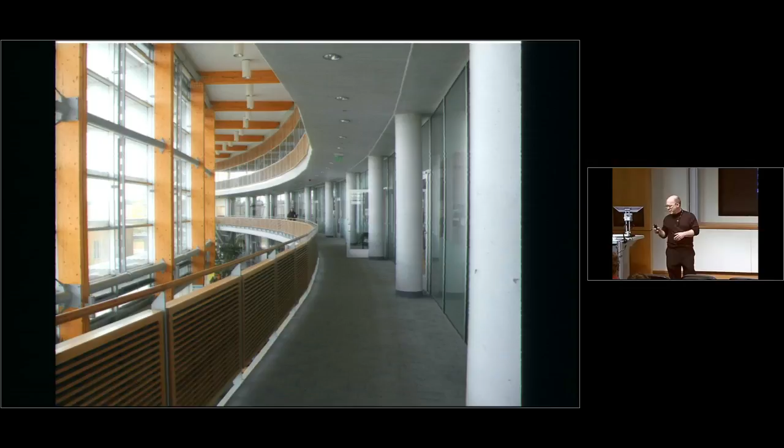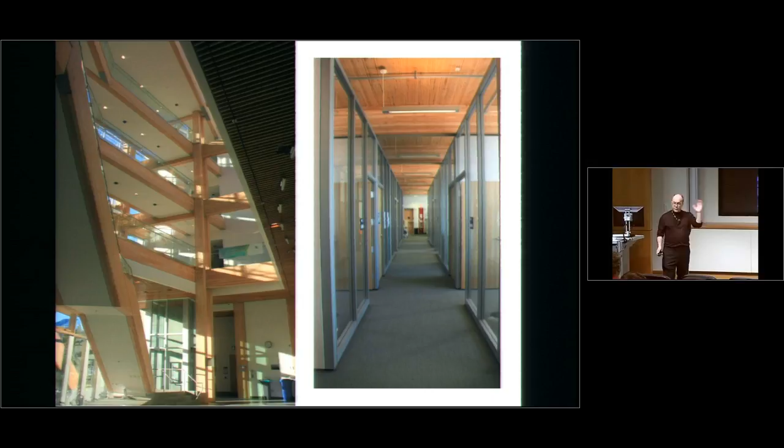Which takes us back to the CIRS Building, which is not a concrete building at all. The first academic building we've looked at, this is engineered heavy timber framing in a 4-story academic university building. Why? Well, partly because it's British Columbia. It's a local resource. Partly because now it's not just a low-carbon structural material, it's a carbon sink. This is a material that is taking carbon out of the atmosphere and locking it up for the life of the building.

Which takes us back to the Aldo Leopold, where the whole thing was built out of the Leopold forest. And I asked the question at the beginning, how does the building become net zero and the entire organization become carbon neutral? The entire organization becomes carbon neutral because their estate is to manage the Leopold forest. And the Leopold forest is managed for carbon sequestration.

And this is allowed under international carbon trading protocols. It's selectively harvested. The harvested wood is used for long duration purposes like building buildings, so that it's not cycling the carbon. It's fixing carbon and taking it out of circulation. And by doing that, by managing a carbon sequestration forest, they are covering the carbon budget of operations.

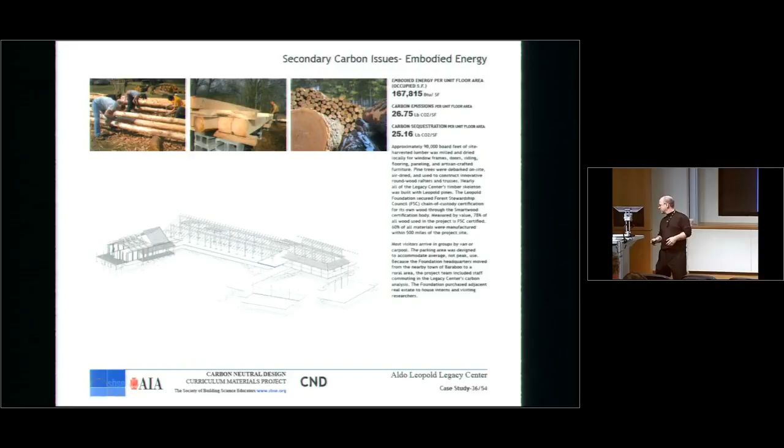Okay. Yes. You take the mic around. That makes sense.

Hi, thanks for being here. So, speaking of buildings being part of these larger systems, I have a question for you about life cycle analysis. Steve Wozniak, the co-founder of Apple, was in town in Austin this week, and he made an interesting remark about energy efficiency and what he perceives to be a little bit of a false promise when it gets to the extent that you're doing this to the nth degree.

And the way he explains it, any amount of energy that you're saving in a situation like this, that money that you have saved does not go out of circulation. Someone is going to take that and spend it on something else that is energy or carbon intensive. So in the context of a university campus, facilities is going to get a new van. They're going to buy a couple more computer monitors. It's not like they just retire that.

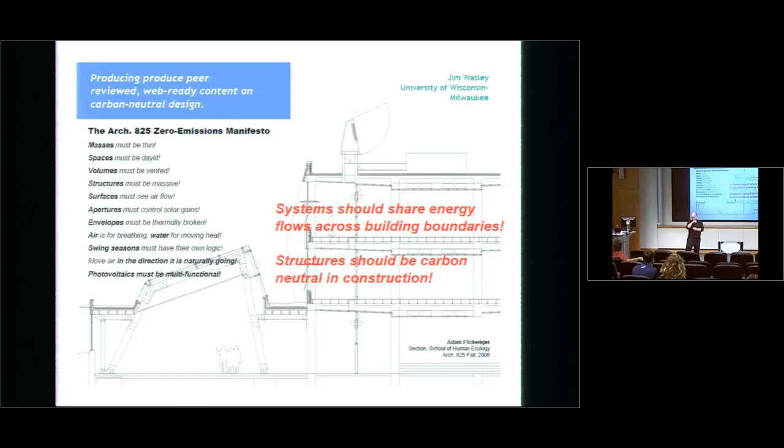That makes sense? Again, lots of different issues that you bring to bear on that kind of question. First, about the existing building stock. And that's an interesting thing that's well documented, at least as a polemic, on the Architecture 2030 website, that yes, the vast majority of building stock is built, but there is an incredible amount of churn in our economy, and from what I hear about Austin, there's an incredible amount of churn here, that building stock is renovated systematically

over time, and if you look at that, Ed Mazria will make a very compelling case that if we set targets, now they might be lower targets than for new buildings, but if the targets similarly ratchet down, you will eventually catch a large majority of the building stock because it will be renovated over time.

And I think this idea that they're working on, and I know of it through the CIRS Building, through UBC's work, but it's a more ubiquitous idea of building district systems and thinking in district scale ways and sharing flows. I think that has real opportunities in existing environments. So the CIRS Building itself was glomming onto a 1970s era laboratory building in its immediate adjacency. So I think there are ways that building larger scale systems might be able to be retrofit to

existing conditions. And then to talk about larger scale developments as a whole, I think we have to understand the physical parameters that make for naturally low energy development patterns. Solar access and density and transit, and it is, again, not thinking about the building but thinking about the system, that we understand those things pretty well. It is just a matter of building those form codes into neighborhood development, for example. So I think it's quite doable.